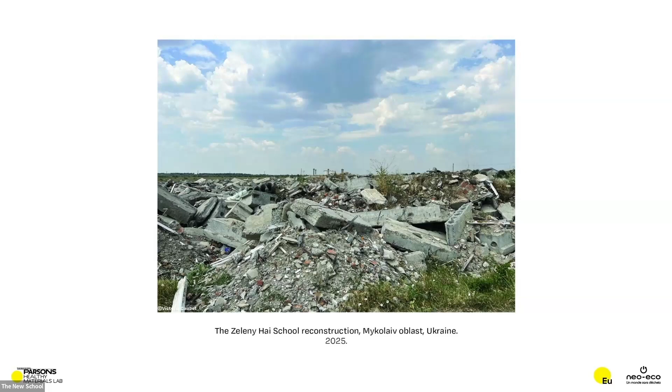I'm excited today to be here to share the journey of the Zeleny Hai School reconstruction project in Ukraine, which I'm the project manager of. This is a 2.7 million project funded by European and Taiwanese sources through the CPVA, a Lithuanian agency. So think of this project as a bridge between international support and local resilience.

The project partners are the CPVA, the funding agency, the Zeleny Hai community, and Neo-Eco Ukraine, which I represent today. I joined NeoEco Ukraine in May 2024, and I will present you my research. It's been quite an adventure, and I'm really eager to show you what we are intending to do.

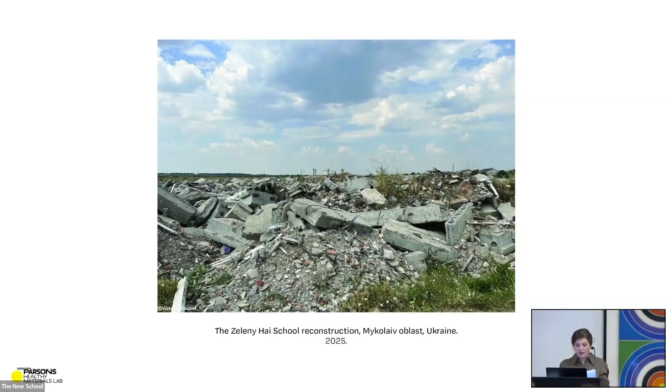So first, a little bit of background. My background is a blend of architecture and hands-on masonry, particularly with clay. I've been working with this material since 2010, discovering the beauty of vernacular building. I'm also a big believer in Cedric Price's anticipatory architecture, designing for resilience and avoiding obsolescence of buildings.

You'll see here an example of a project focusing on flexible, reusable space made with reusable materials and fixings. My coworkers and I repurposed materials from old farms many times, like century-old oak beams, stones, tiles, and bricks, to rebuild a wattle and daub house.

It's very important to put people in the heart of the design and always imagine them inside the process. On the project you can see on the bottom right, we were reusing everything. We were bending nails to make them straight, and we even reused frying oil to fuel our old trucks from the 70s.

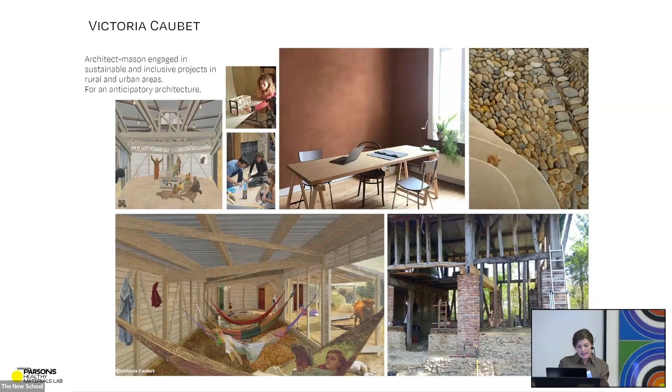Then I had a transformative experience at BC Materials in Belgium. They're pioneers in turning excavation waste into building materials, and they're a true beacon of circularity. My masonry experience was very valuable for prototyping robust construction materials.

We worked on developing earth screeds without cement, that's the second image. We worked on developing circular facing blocks for the Design Museum of Ghent. And we also worked on scaling up earth block production, going from 700 blocks a day to 70,000 blocks a day. This experience allowed me to dive into material science.

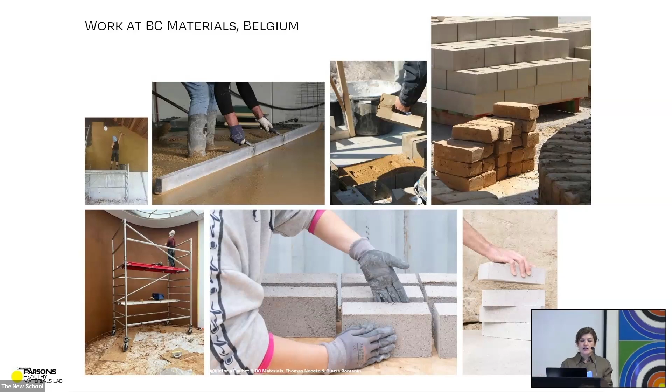Part of my missions at BC Materials was to do professional training. Just before the full-scale invasion, actually about a week before, I was on the ground training Ukrainian contractors in earth renders. It was a critical time, and it made me want to support the Ukrainian people.

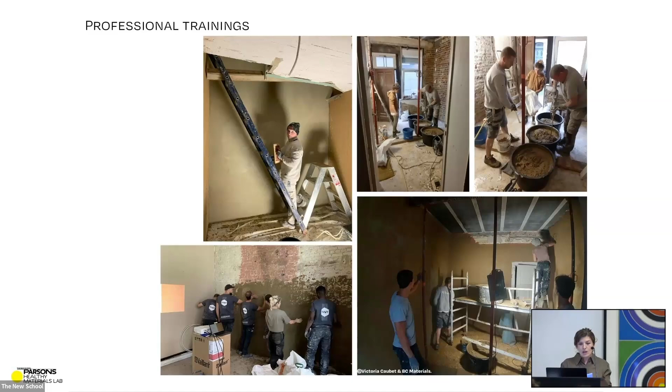Now I will talk about the situation in Ukraine. The scale of destruction is immense. The World Bank estimates put reconstruction costs at 524 billion dollars, 3 times Ukraine's 2024 GDP. To put that in perspective, the LA fires caused 250 billion dollars of damage, less than 1% of USA total GDP, 0.92% of USA GDP to rebuild.

We're facing mountains of rubble. This raises a crucial question: how do we rebuild responsibly? Construction is a major contributor to global warming, with concrete alone accounting for 10% of global warming emissions. In Ukraine, we have an opportunity to build back better using circular resources, turning devastation into innovation.

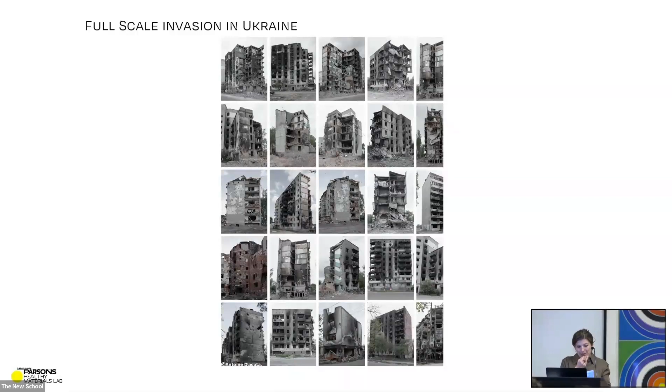So I joined, NeoEco invited me to join them to rebuild the school in Zeleny Hai. I thought that was a very interesting project because they had their pilot project in Hostomel, a site of terrible war crimes, where they turned 4 buildings into aggregates to rebuild.

They also have a wider approach, because they're specializing in circular resources and circular materials and developing circular materials, but they're also integrating social aspects. Here we have a picture of veterans who are following some recovery sites, dismantling and sorting rubble. It's kind of therapeutic for them to be working as veterans together in groups, to be in a team and to be active.

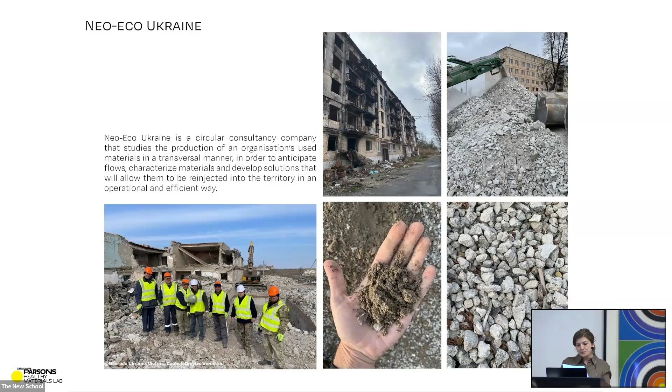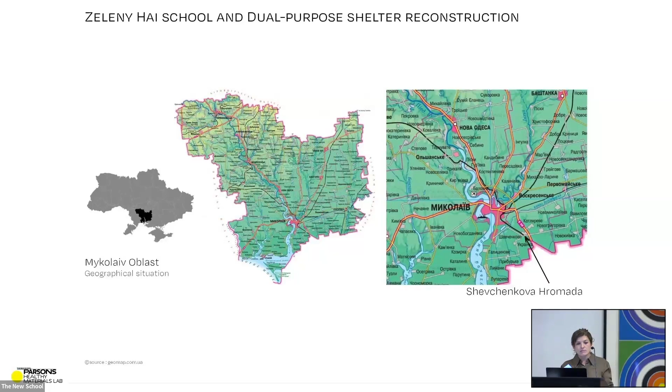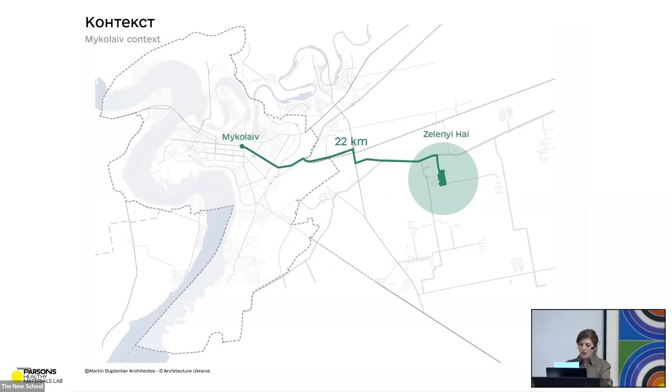Now let's focus on Zeleny Hai. The village of Zeleny Hai is located between Mykolaiv and Kherson, the front line. An interesting fact about the village is that it was a Soviet state tractor farm, founded in the 30s under the name of Section 4. Some of the villagers were forcibly displaced after World War II from the forested area bordering Poland.

The name Zeleny Hai means green grove. It's a poignant reminder of the displaced villagers' home. The community is incredibly resistant, and well, they faced... yes, sorry, I'm confused.

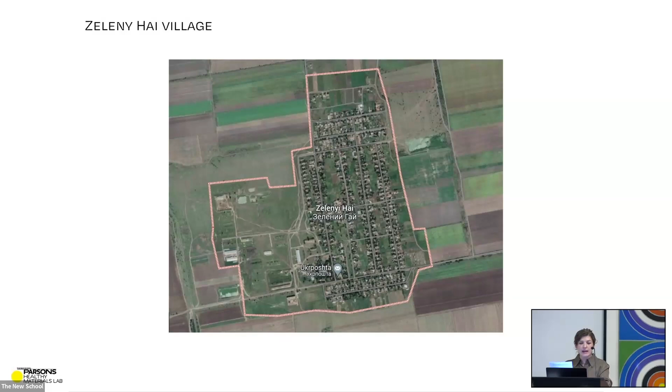So here is the typical typology of the village. It's one house, low housing village.

The community is incredibly resistant. They faced military attacks, loss, and years without in-person schooling, 5 years. But they're active, creative, and passionate about rebuilding. They've installed solar panels, restored water access, and are demining the area.

The front line, like when they were at the beginning of the full-scale invasion, the Russian army went all over Mykolaiv, but they didn't manage to get into Mykolaiv. They went north of the oblast, and then they were repelled back to Kherson, back to the other side of the Dnipro River, which is some natural border formalizing the front line.

They're also very close to their environment, and they're interested in using local bio-based materials like straw, reed, and clay.

The head of the village told me stories of their community dances, festivals before the war, and that's the spirit we're trying to rebuild.

The school history followed a little bit the development of the settlement. It was first built after the war, and then it evolved into a gymnasium in the 80s. So gymnasium is like high school, which was a typical Soviet concrete building.

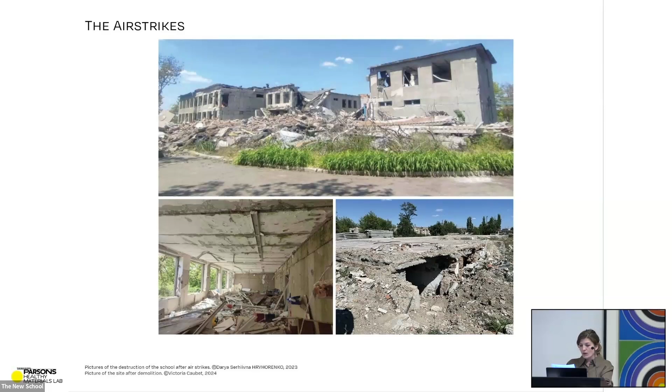So we want to rebuild this school, which will be a crucial step for the recovery of the village and the people who were related to these casualties, and then the trauma of the people who were in the basement also.

So I wanted to address the site and look at the resources that we can find in the area to rebuild. So the first step to addressing the demolition was to assess the demolition waste.

The building was demolished by the military organization and the villagers, and the waste, the rubble, was stacked on the site in the village, but it's all mixed. So we aim to sort it, recycle iron, crush concrete, and safely dispose of asbestos. Just for your information, asbestos was legal in Ukraine up until 2023.

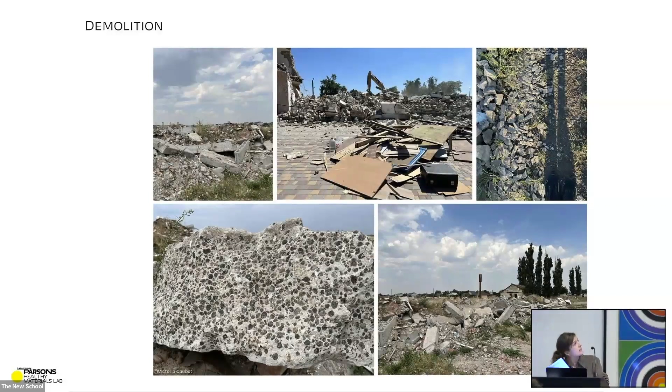The site now is very flat like this after the demolition. The flat is like this, and they always have these nice trees.

On the right side, we wanted to repurpose the concrete slabs, but unfortunately they're not available. They were already given to the military organization, so we will not be able to reuse them.

So we're trying to see how we can go beyond just the rubble and see what else we can repurpose. We also want to repurpose the foundation of the basement to use it as the first layer of the new foundation for the school.

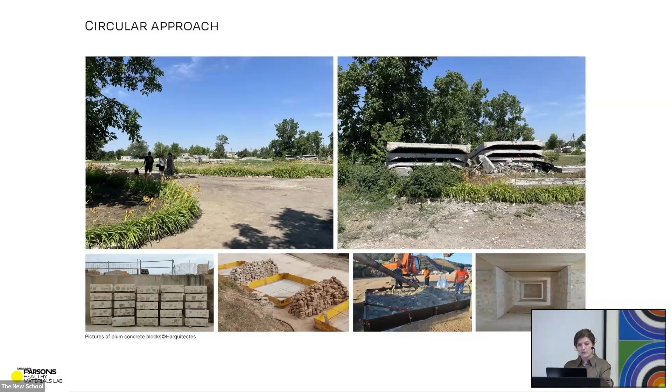So part of my research was to see how many sustainable material manufacturers there were in Ukraine. But the industry is very damaged in Mykolaiv, and I think it's an opportunity.

The reconstruction is also an opportunity to develop local regional specialization, because the country has a lot of resources, very diverse, very good materials, and the way it was developed was very dependent on Russian industries and building materials.

So at the moment they are also big producers, but at the moment there are some materials missing. Just to show you a little bit here in Mykolaiv, if you see the circle, this is the 100 kilometer radius around the Zeleny Hai School. And the only manufacturer we have is a cement plant.

We see that the western part and the eastern part were really rich. The ground was really rich in stones, clay, coal, and so on. But it was preferred to go to the Donbass, which was a very industrial place.

Now most of the industries are not accessible. So the western part is more of regional natural spaces, and currently they are industrializing this part, which was natural, and they kind of have to damage the landscape there, which is a shame, because it answers the demand for materials in Ukraine.

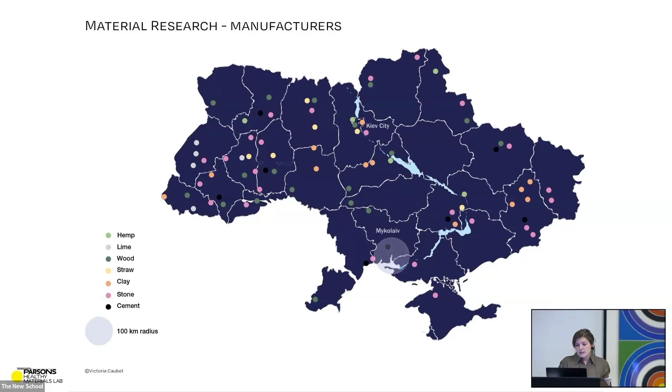There are challenges for construction, like the lack of glass. There is no production of glass in Ukraine, and mineral wool production isn't enough. I was looking in shops for local cement or local products, and a lot of products are coming from Poland, so they now have to import a lot.

So I thought that with Ukraine being a big producer of grains and bio-based material, and given the lack of mineral wool, we could maybe replace the production of very carbon-intensive and polluting materials like mineral wool with bio-based insulation for the school.

However, I made a study of all the norms I have to comply with for the school. At the moment, insulation materials for the reconstruction have to be non-combustible, the maximum level for fire safety, but it's only one norm. Bio-based materials can achieve a category under the Ukrainian norm called G1 - G4 being very flammable, G1 being not flammable. Hempcrete is G1, straw is G1, but there's just one norm preventing us from using it, so I tried to lobby for changing the norms.

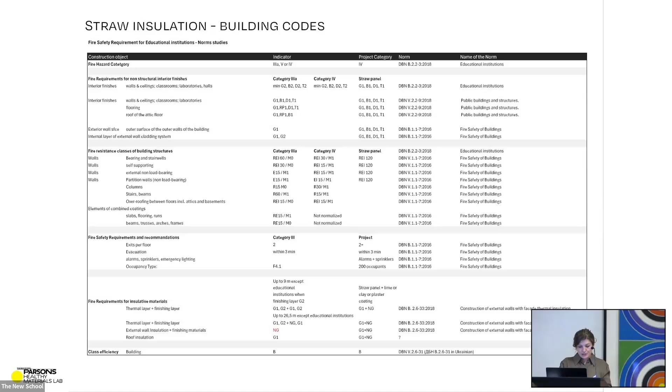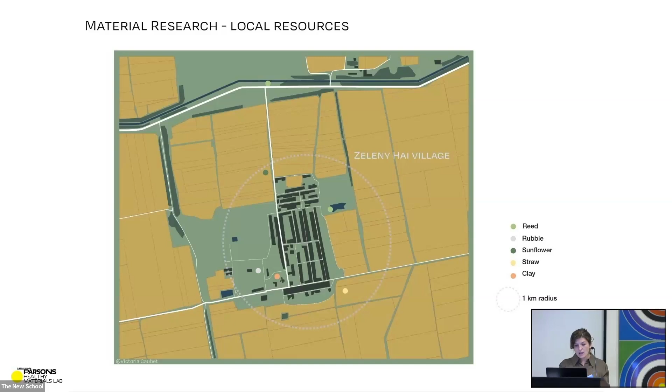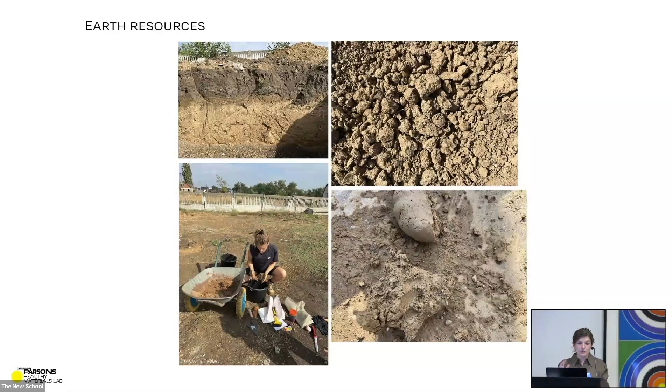So I was making some field tests. When you're working with earth materials, you can go on site, and there are actually three or four little tests you can make to assess what type of clay you have, and if it's suitable for construction. This clay was absolutely beautiful and very suitable for construction after this little test.

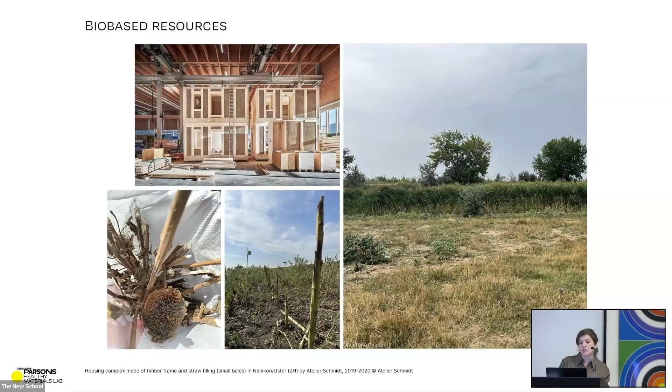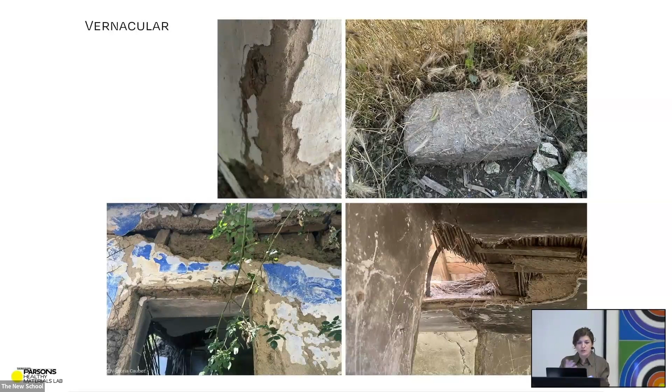We can see the roof lattice is made with reed. We can also see different layers of render, and I suspect the thinner render of earth has an additive of horse manure, and then there is the lime wash or lime. So every resource here is available - you can build with these resources, you can even have a roof with reed.

So I will go quickly on the architectural project. If you have questions about it, you can ask me later or during the questions, because I don't want to take too much time for the presentation.

Our architects are Martin Duplantier Architects, a French architect who started working in Ukraine in 2015. At the beginning of the war, he decided to open an agency in Lviv, which is actually run by Ukrainian architects. It's a real pleasure working with them - they're very professional, and we chose them because they were also very concerned about material, reusing concrete material, and so on.

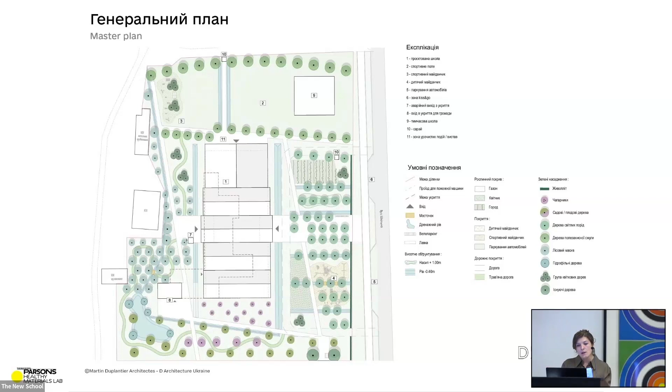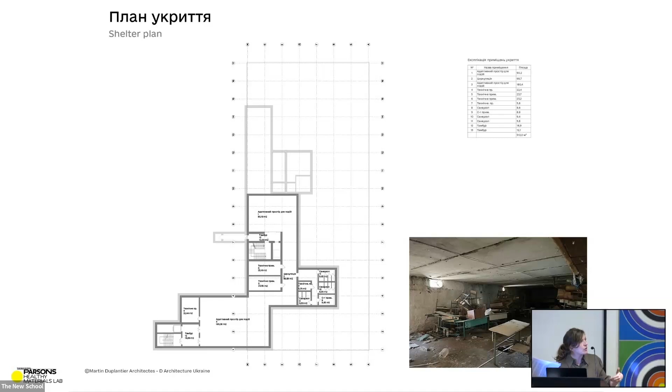This is the state of the bomb shelter, the basement that protected 60 people, and also protected the community for the whole time of the occupation - they were going there every time there was an air raid.

So this is the plan.

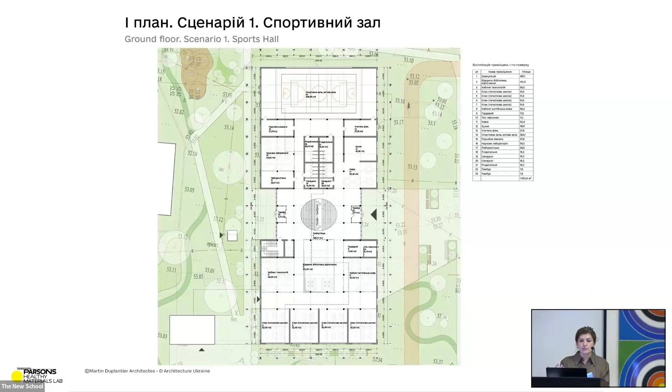So to have a quicker process of reconstruction, we want to rebuild with modular construction. This is why we have a 4x4 meter grid. You can see that we try to keep the primary school together.

On the top of the plan we have the kitchen. One of the strong aspects of the project is this in the center, a flight of stairs serving the second floor. And then we have the assembly hall combined with the sport hall.

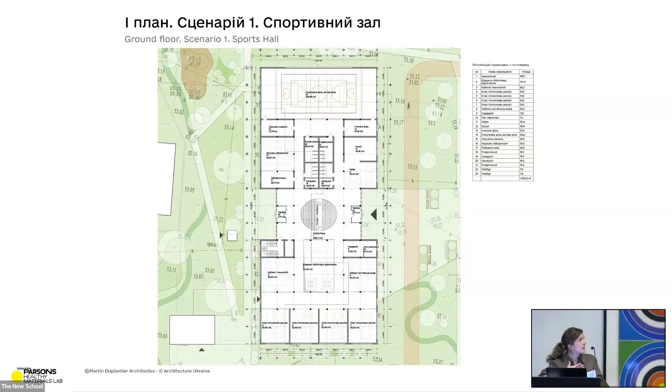An important aspect of the project was transparency. Because the Soviet schools were very dark with a lot of corridors, the architects are trying to open the space and create more light for the new school.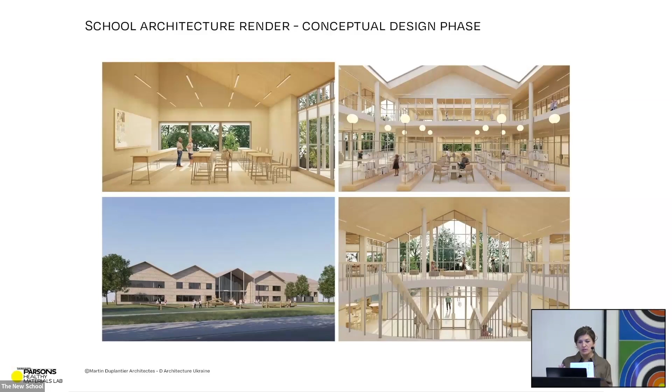Another aspect of the project which is important for us is community resilience. We have been organizing workshop series with the children, because they haven't been to school for 5 years, due to 2 years of COVID and then 3 years of war. So they kind of desocialized. We are organizing these workshop moments to bring them together.

The participants, the children who are participating, are very creative, very motivated, very hands-on. It's very exciting when we have these moments. And we aim to organize this workshop around the idea of co-designing a mural.

So that's interesting, and for the students who were here today, we want to create a local decor. In the beginning I wanted to do Vyshyvanka, and then I discovered that Ukrainian culture is a lot more than Vyshyvanka. There are a lot of local traditions, so we are inviting local architects, local artists, local people from the museum, from cultural life.

To come and tell us more about the history of Mykolaiv, the history of the villages, the history of Soviet farming, and we aim to create together with the children this mural that will be in the school.

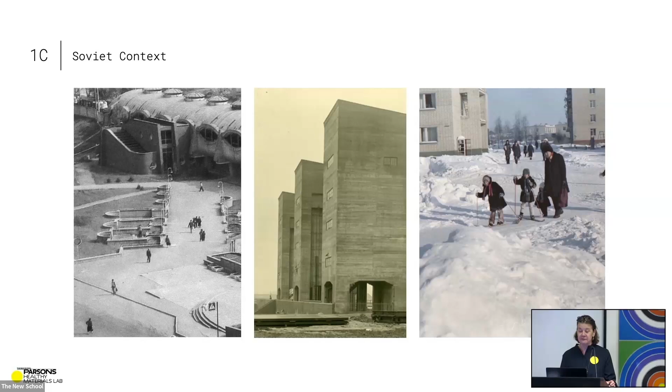Kryvyi Rih is known as the steel heart of Ukraine. In 1919, Ukraine was incorporated by the Russians into the Soviet Union and was developed as a factory mining city according to Soviet urban and political planning. Because it's so close to the front line, it's routinely attacked—the latest attacks in the city were just over a week ago.

As a US school, it was imperative that we began our work from a Ukrainian perspective, in conversation with Victoria and Anna and three Ukrainian students from Kharkiv School of Architecture. Before the studio began, Victoria and Anna bravely traveled to Kryvyi Rih to meet with the municipality and document the local buildings that are the focus of the studio—a critical part of the process. We thank them for going into the war zone.

There were many insights shared by the students, and their lives mirrored others in Ukraine: displacement, exploring their Ukrainian identity, a desire to rebuild community, and their architectural and historic understanding of the cities and buildings of Ukraine. We were also interested in how they spoke about their homes and the importance of the natural environment. They shared insights into their lives still influenced by the remnants of Soviet planning and Soviet education. Their work is recorded as an important part of our foundational research, and we're incredibly grateful for their generosity and wisdom, which has been incorporated into the student work.

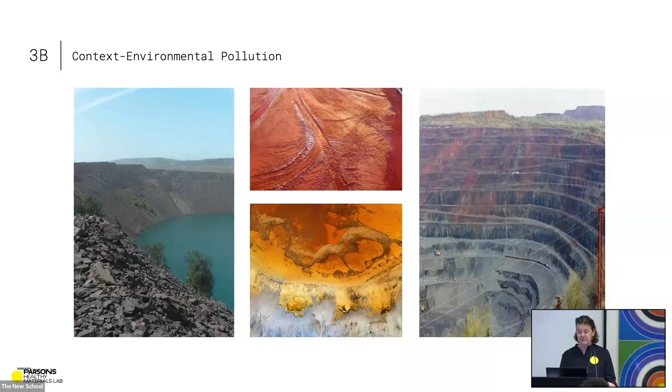Housing is a critical need across Ukraine and also in Kryvyi Rih, because of the Russian war and the displacement of millions of Ukrainians.

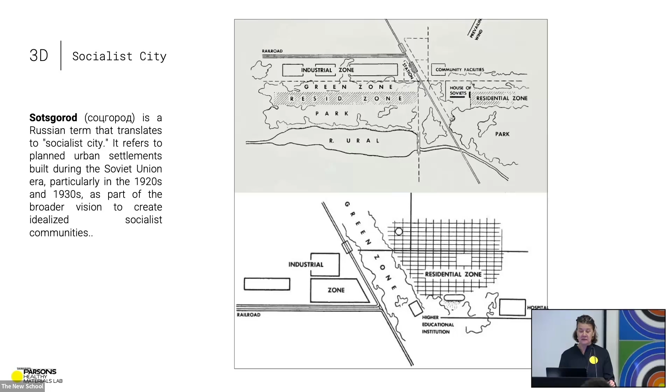Kryvyi Rih was planned and developed during the Soviet period, described as a Sotsgorod town, designed to reflect socialist Soviet values and support industrial growth, often located near factories or industrial complexes. At the scale of the neighborhood, the mikrorayon were functional, self-contained neighborhoods including essential services like schools, shops, medical facilities, and green spaces, all designed to be within walking distance of residential areas. All of our sites clearly embody this planning.

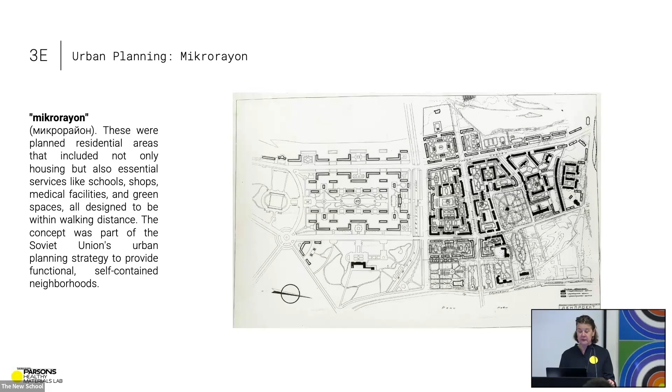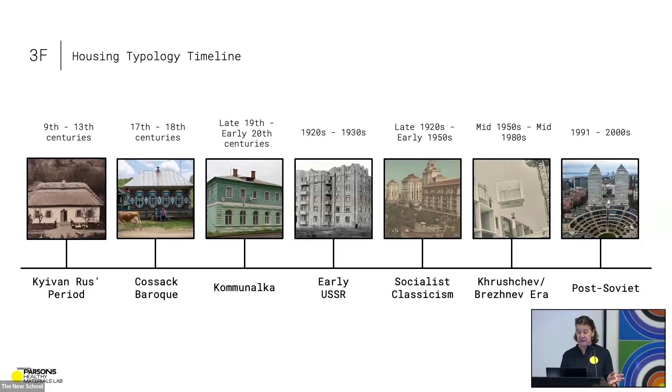In Ukraine, we can identify clear historic typologies, from traditional houses with wattle and daub walls and thatched roofs to the post-Soviet era, with clear stylistic characteristics for each historic housing period. This is quite phenomenal when working on sites with such clear historic roots—unusual for us in the US, where there are much less clear delineations in our cities. This has been a surprise for me in this work.

Two of the buildings we're considering are from the Socialist classicist style of the late 1920s to the early 1950s, with high ceilings and thick walls, originally intended for the Soviet elite.

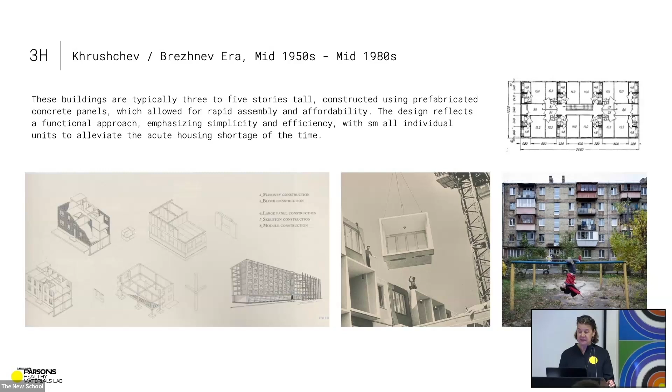But the majority of the buildings the students are exploring are from the Khrushchev-Brezhnev era. A Khrushchevka is a type of low-cost, mass-produced, five-story apartment building extensively constructed across the Soviet Union from the late 1950s to the early 1960s. This housing was designed for a 25-year design lifetime, as a disposable home.

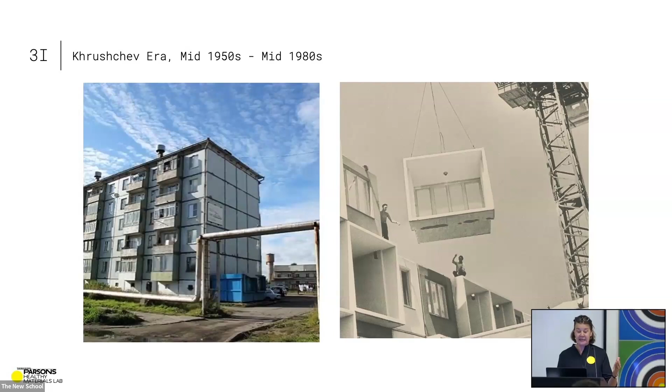So the Parsons students spent the first part of the semester conducting site analysis of the city and the eight sites, extracting information about existing buildings from original Ukrainian documents supplied by Victoria, and reviewing architectural precedent studies and local insights from the Ukrainian students.

These are the locations for the studio: eight municipally controlled sites distributed along the 100-kilometer length of the city. This is an extraordinary city in its extent—a linear city flanked on either side by industry, quarries, and mines.

Some of the buildings were originally designed as housing, others used as sanatoria, offices, and kindergartens. The object of the studio is to adaptively reuse, restore, or demolish and rebuild social housing, reusing as much of the original buildings as possible. Where new materials are used, they must be biogenic or earth products, grown or collected close to the site—the most sustainable option to reduce embodied carbon in rebuilding, and the most economical.

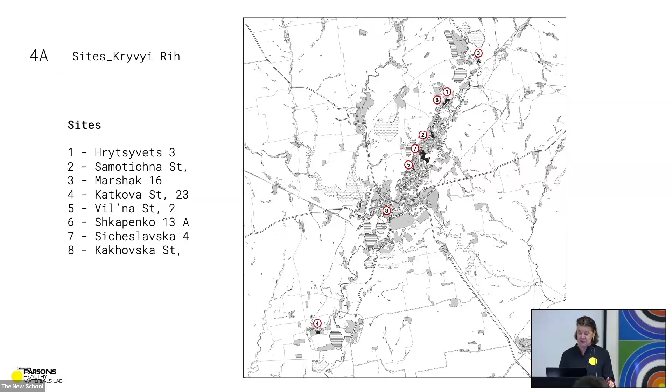As we know, the country and the municipality are really challenged in terms of their ability to access funds. The buildings range from buildings 1 to 3 in need of some restoration, to 4 to 5 that are major renovations, and buildings 6 to 8 that are difficult or impossible to reuse. We also acknowledge that the original buildings were built to support workers in the city, where their labor was considered more important than their humanity.

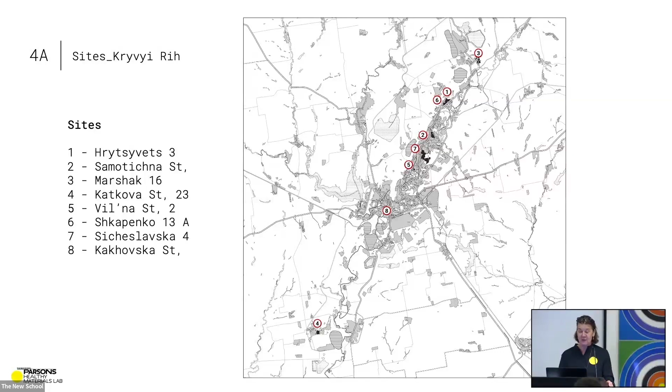We hope to address that imbalance in the ongoing design work of the semester. So we're going to look at some of this early design work that we looked at this afternoon, right Victoria? So Aidan explores buildings as living things, making a connection to the historic agricultural roots of Ukraine in this former administrative building. One of his adaptive reuse strategies for the existing classicist building is to insert a series of furniture assemblies - in this case, for a single IDP, internally displaced person, a bunk bed and a window box that efficiently creates a beautiful place for healing.

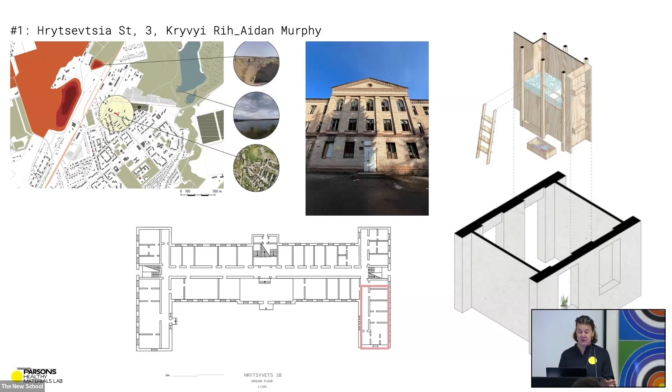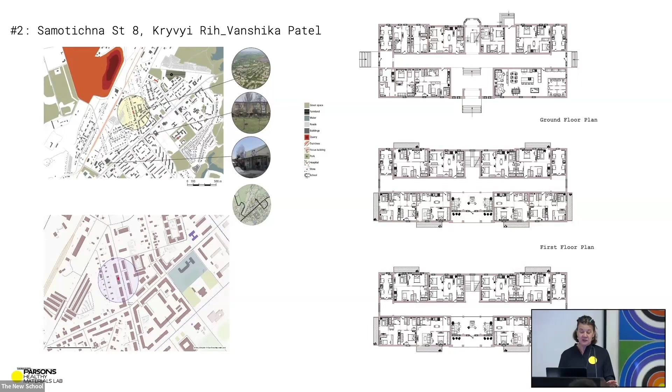Vanshika's project explores how architecture serves as a medium for storytelling by redesigning Ukrainian housing to reflect resilience, identity, and cultural continuity in the face of a crisis, informed by the Ukrainian students. She's created a furniture inventory from the existing building, all of the items she can identify from the survey photographs. Her apartment plans address new ways of living to create spaces that provide shelter, but also preserve cultural memory.

Isabella explores planning interventions in the existing building that support intergenerational living and the creation of novel things like new porches as places of refuge for residents.

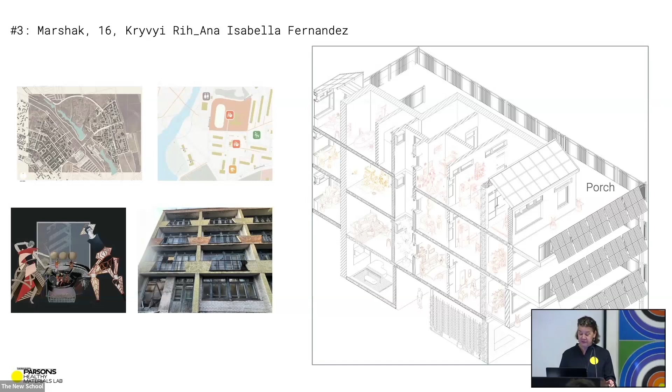Mateo and Ema's approach to this project is the adaptive reuse of the existing building, prioritizing light, space, and community engagement with minimal disruption. They aim to achieve this through components that are quickly fabricated and installed, recognizing the urgent need for housing solutions in Ukraine.

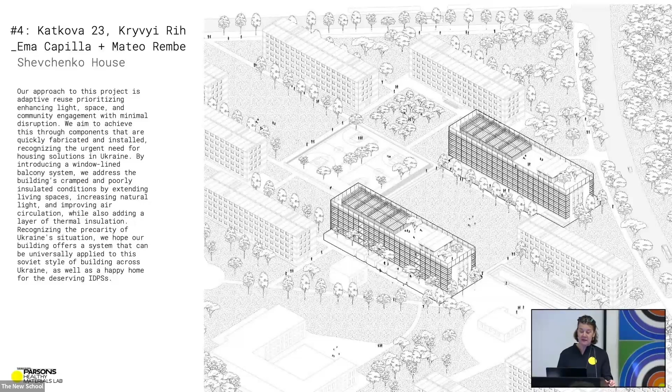By introducing a window-lined balcony system, they address the building's cramped and poorly insulated conditions by extending living spaces, increasing natural light, and improving air circulation, while also adding this critical layer of thermal insulation. None of these buildings are insulated. Recognizing the precarity of Ukraine's situation, they hope their building offers a system that can be universally applied to this Soviet style of building across Ukraine, as well as a happy home for the new residents.

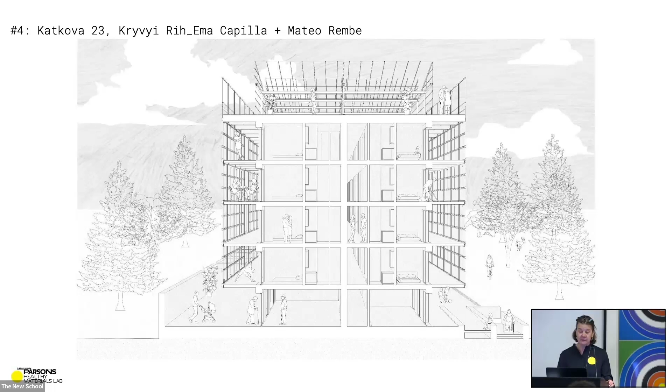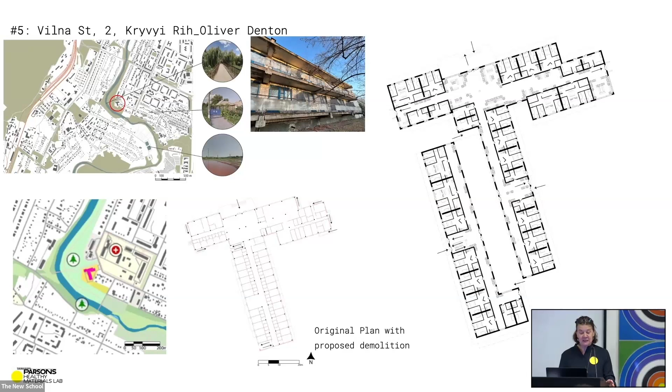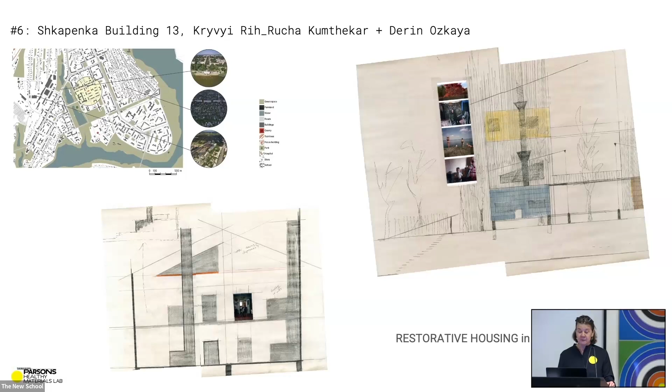Potentially, yeah. Rucha and Derin proposed demolition of their building because of structural problems. They explore how circular materials strategies can be used to repurpose a former kindergarten into a neighborhood healing center by utilizing accessible housing and family-oriented living spaces. They leverage adaptive reuse, some modular construction - a pattern you will see in the students' design work - that addresses this housing crisis as well as a cultural crisis.

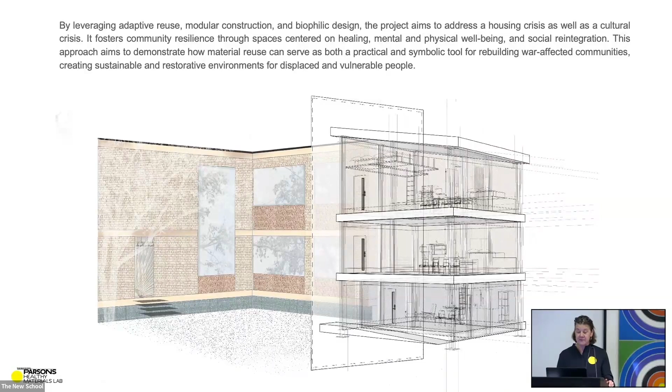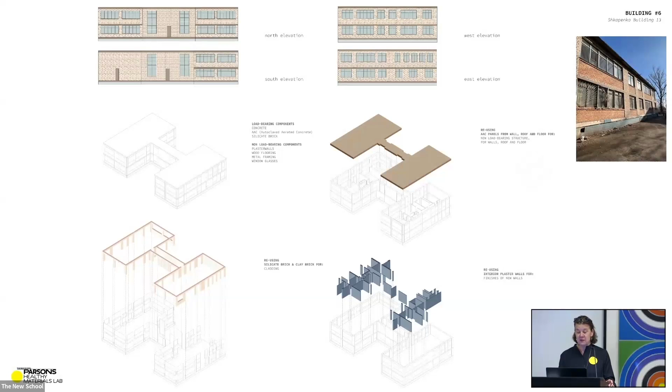The team reviewed the existing building materials before demolition of the structurally compromised structure and documented materials for reuse, including the bricks, the gypsum plaster, and the autoclaved aerated concrete - the AAC, a lightweight prefabricated concrete building material - all identified as materials for reuse. In this proposal, material reuse can serve as both a practical and symbolic tool for rebuilding war-affected communities, creating a series of lower-scale houses and restorative environments for displaced and vulnerable people.

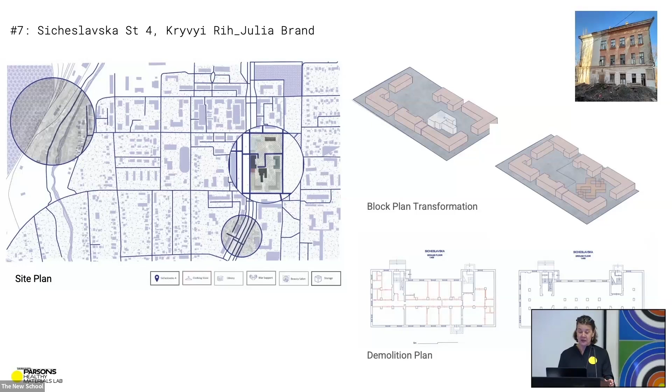Julia proposes gutting the building because it's structurally compromised - potentially, though this is a conversation - preserving the facade and enhancing its structural integrity. She also considers the urban context: the 6 buildings on the block. She's looking at the block as an urban kind of project, and you'll see that in those little diagrams on the right there.

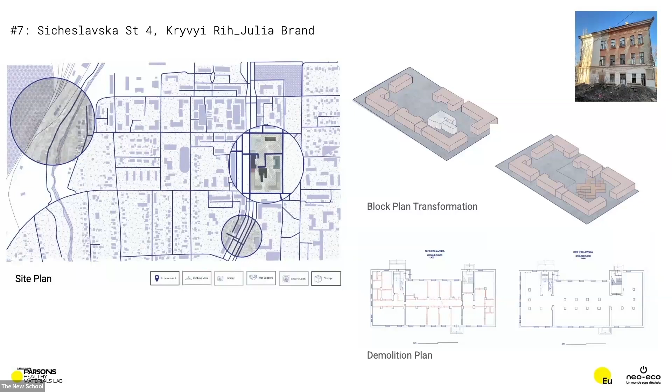Repurposing the spaces within as community areas, she proposes a new reading room that connects 2 libraries on the southern part of the site, creating a safe place for preserving the exchange of Ukrainian knowledge and heritage. Julia drew inspiration from Ukrainian culture, and we now understand that Ukrainian patterns vary regionally. Her ongoing research will be to look at those patterns for the area around Kryvyi Rih and use those to infuse a cultural and symbolic element in the design.

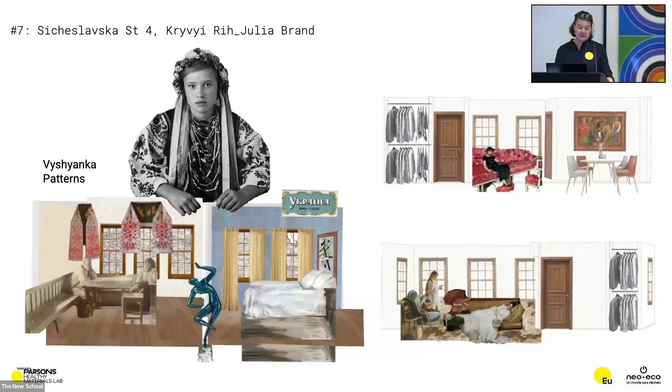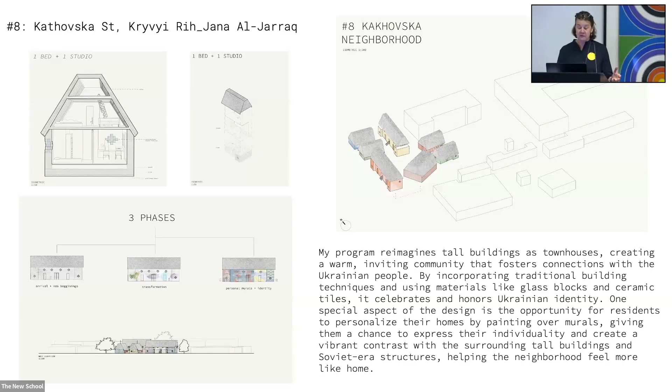Jana's building could not be renovated, so she explores the site after demolition. She reimagines the tall buildings that were on the site as townhouses, creating a warm, inviting community that fosters connections with Ukrainian people. By incorporating traditional building techniques and using materials like glass blocks and ceramic tiles from the original building, it celebrates and honors Ukrainian identity.

In this design, there's an opportunity for residents to personalize their homes by painting wall murals, giving them a chance to express their individuality and creating a vibrant contrast to Soviet-era structures, helping the neighborhood feel more at home.

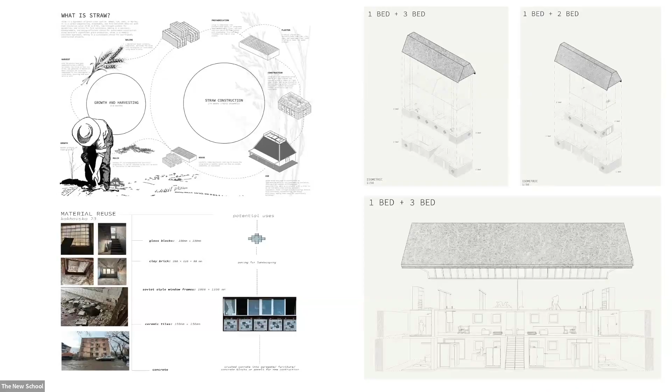The work we shared with you this evening is part of Healthy Materials Lab's 10-year pursuit to change the design and construction of buildings. It requires collaboration and dedication from people from a variety of backgrounds, expertise, and perspectives who believe it's possible to change the way we build for the future.

We understand that we can empower and enable architects and designers to make change today if we provide them with free practice-based tools, resources, and education.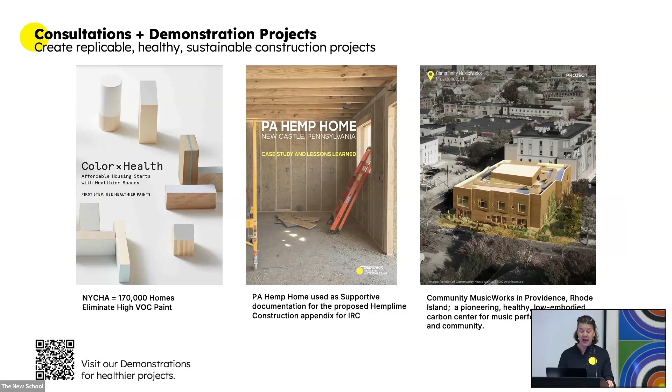Our tools and resources support our consultation towards affordable and healthy spaces, and you'll see some of our publications in the back that are all available online. We offer access to vetted collections of healthier materials and physical examples in our library on campus in New York City.

To support our new EU initiative, we've also identified all of the EU-based products in our materials collection. So you can look for those by looking for the EU logo, the circle of stars.

We share material research stories in our podcasts and events like this evening's, upcoming March 25th. We'll be looking to the oceans for materials insights.